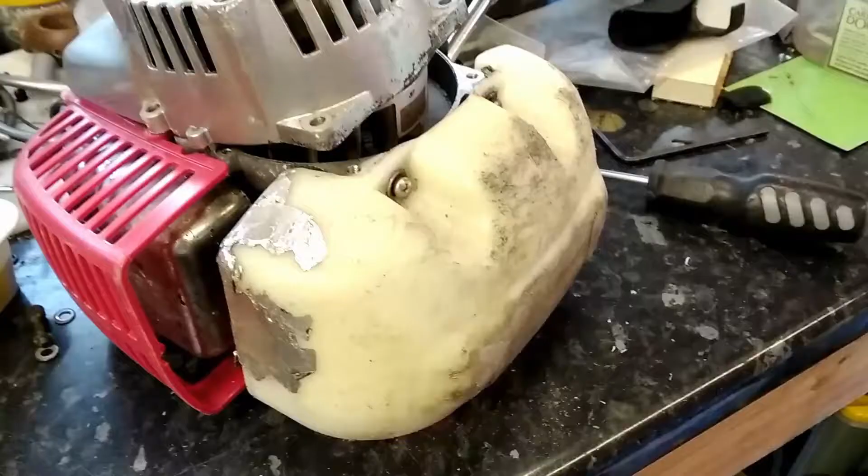So now I think we've got some screws that hold this thing on, and we'll have a look at that. We'll take those off in a moment and reveal what's behind it. Okay, so we've taken the screws off and lifted this up. There are some little locator pins which fit into the frame, so it could be a little bit trickier to pull out, but not very tricky.

And obviously here's the clutch, which I presume - yes, because of the spring. Oops, I keep moving, sorry, I don't do cameras very much. I presume this is a centrifugal clutch, so when it goes fast, these spring out, I suppose. These springs keep them in, and they engage with this little drum here, which is the bit that I'm after.

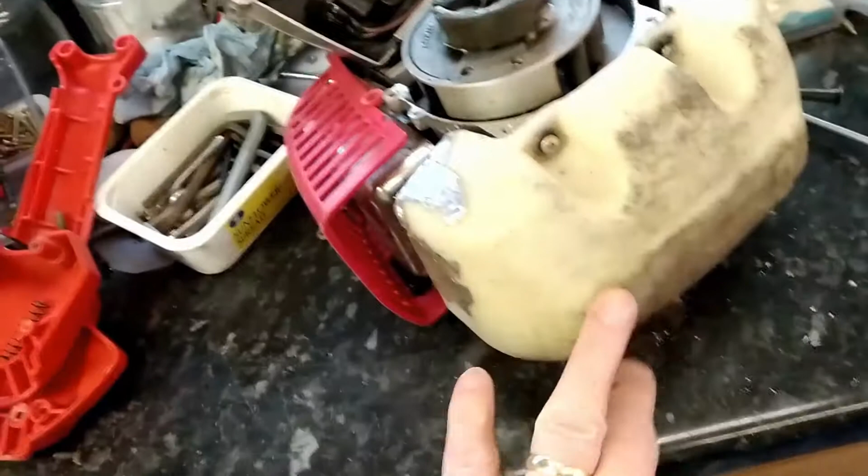So I'm going to make that bit. I'll keep all of this, I think, most of this. I'm going to make this bit part of the new arrangement, which means we can get rid of all of this - the tank and the piston and the really dodgy carburettor, which has never made it run very well.

There we are. The thing I really hate about it is the noise. I don't like the noise, don't like the smoke, don't like the smell. I don't like playing with petrol. So I'm really quite pleased to get rid of it.

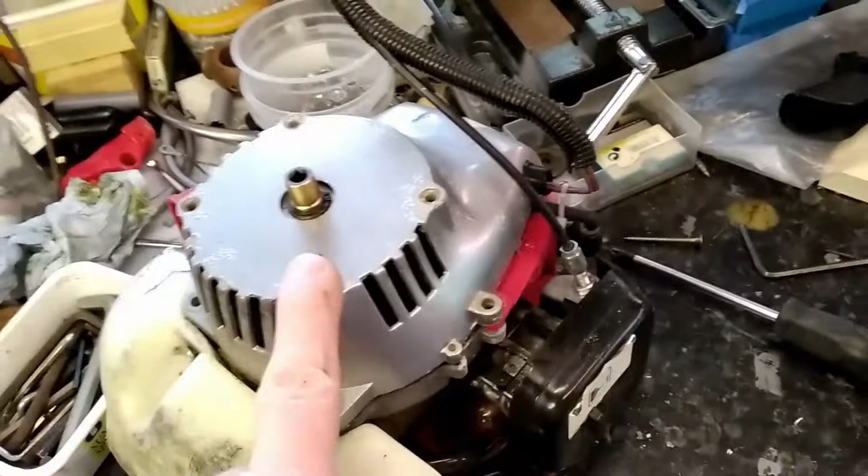However, I've got to make the thing work. So I shall show you the electric motor in a minute, but first of all I'm just going to take this whole shell off, and we can see what we're going to do with it. So a bit of tidying up to do, and we'll have a look at it again.

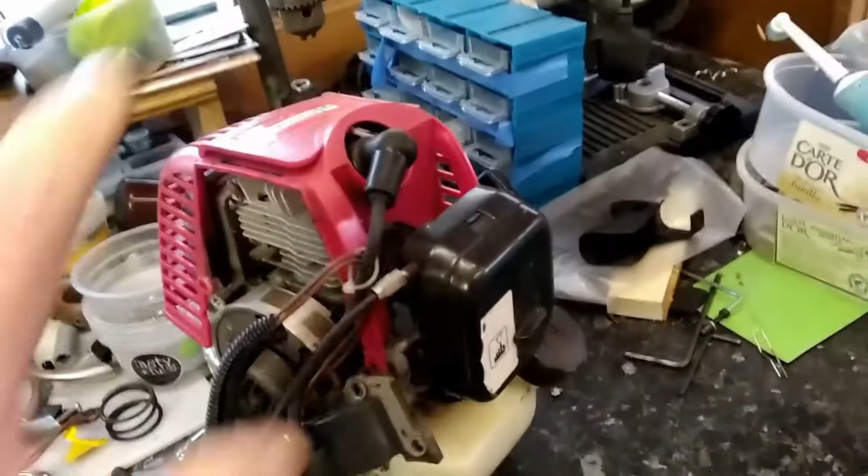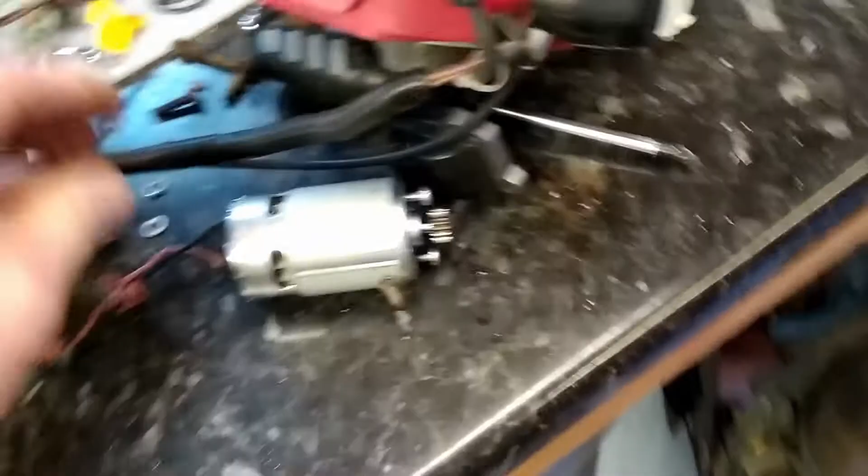So the purpose of the exercise is to replace this hand-sized, loaf-of-bread-sized motor, which is the single-cylinder motor we don't want anymore. We want to try and replace it with this little thing. So there it is - that's the old motor, and that's the new motor.

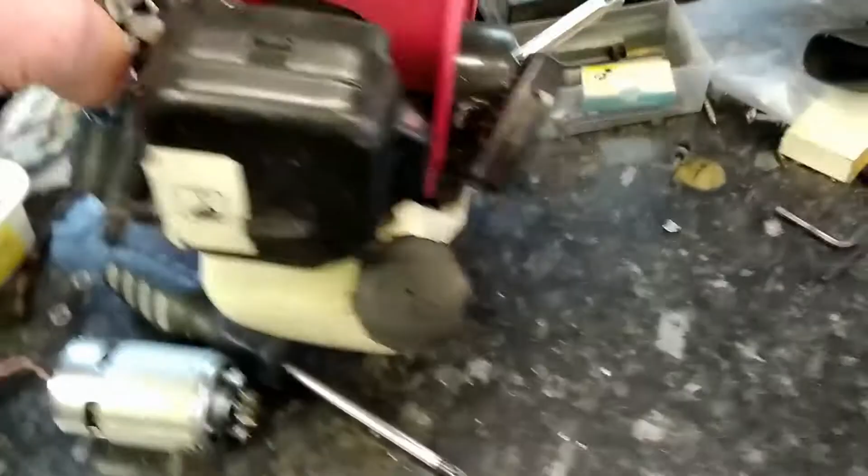Yeah, I wonder if it's actually going to work. I shall let you know. These are quite powerful little motors. I think this is what's called a 775, but it doesn't have a number on it, so I can't be sure.

Whatever it says, we're going to use it. I know it works off 18 volts because that's what the old NiCad battery that used to power it had. So this goes - thank you very much for years of really irritating service.

And then this is going to have this stuck in it like that, by some means or other - not quite sure how we're going to do that yet. So that will drive that. That will have the snout put back on again, and then that will drive the tools. We shall see.

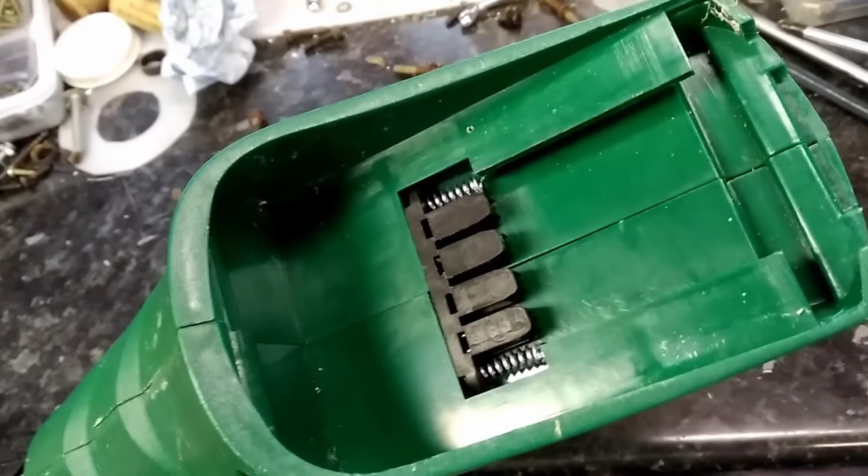So this is the handle of the old hedge cutter, and it's got a battery holder in it and a useful-looking trigger. So what I'm thinking of doing is, whilst I'm working out how I'm going to mount the little electric motor on the old clutch plate, I'm going to look at whether or not I can modify this battery holder to work with the battery for this mobile drill, which is also an 18-volt battery.

I don't want to damage it because this is my little tool. It's only a cheap one, but it works. But that 18-volt battery has a very similar looking, but not identical, unfortunately, connector. Hold on, let's just show it to you.

So here's the battery, and you can see it's got 3 pins and a slidey thing. So 3 pins and a slidey bit. And this has got a slidey bit and a couple of pins. And obviously they don't actually marry, but that sort of slides in.

So I think we could actually modify that. It slides on but doesn't connect, so that might be useful. So that's the type of connector we have in the existing drill, positive and negative - negative on the left and positive on the right. And you'll see that it's not the same pitch.

I don't know if you can see, but actually it's not quite the same pitch as the one that we've taken off the old thing. They look as if they might just be, but in fact, when you look at them, they're one line up and the other one is about half a hole off. So we will take this old one

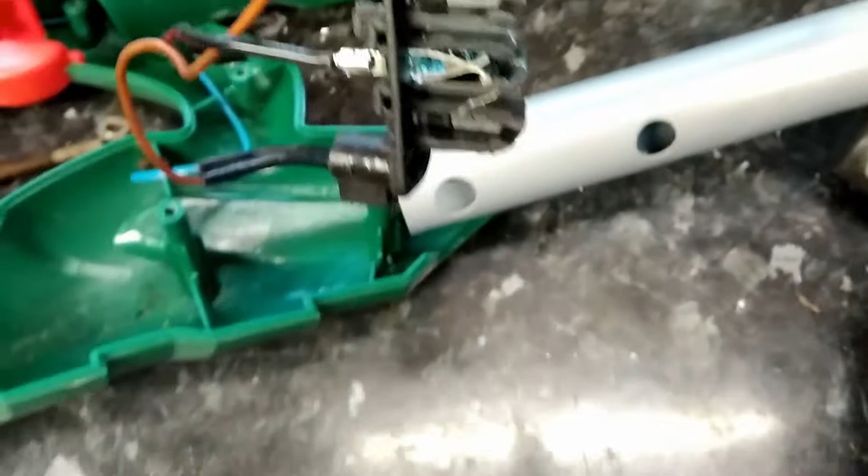and we're going to chop it probably in half. Yes, chop it in half here, I think. See if we can fiddle with it to make it work, make it go together, and then somehow magically make it all fit together, and then go back into this thing, and then this battery will slide in because it fits, as my mother used to say, it fits where it touches.

But it actually fits more or less into the case. Okay, it doesn't have a latch, but we might even be able to modify that. Don't know. So it fits into the case like that. Sorta, kind of, sorta. I think this is going to work. It's going to be a bodge, but it's going to work. Hold on, let's have a look at it.

Yeah, I think if we just add a bit of plastic coming down from that green bit to snag that little red triangular bit just there, then that battery can be made to lock in place to this, and then we'll have a device which locks the battery into place. Fiddle about with that connector so we can make the connector.

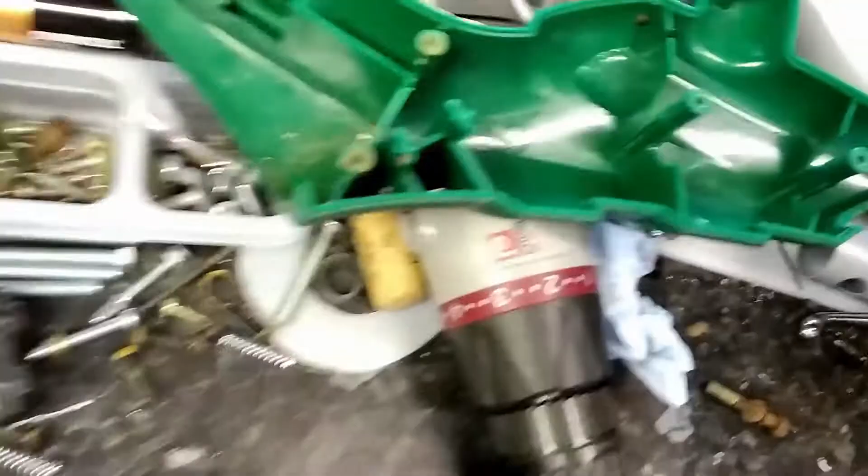The battery isn't quite long enough to go to where the connector originally was anyway, so it's going to have to be in a new position. So I think we can do it. Might have to do a bit of 3D printing. We might have to do a bit of other bodgery.

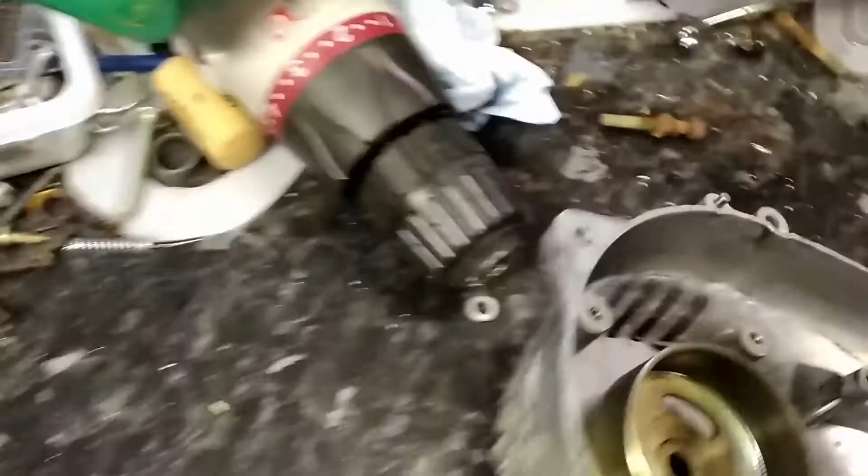Oh, I was thinking about this other thing. Hold on, let's just move this around. So what I'm going to do, using a bit of the old hedge saw, rather than have to go to the trouble of taking the cog off the motor, I might as well use the assembly it came with.

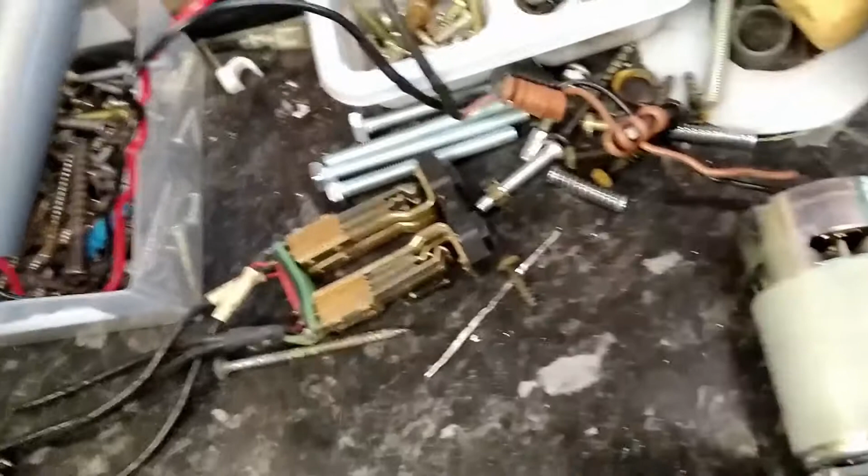It had a reduction gear, which is roughly 3-to-1 reduction gear. This turned another big cog, which is a bit greasy, so I'll put in a box. So that slid onto there, and that off-centre bit is what drove the blades up and down, but we don't need that. But I think this will go into here.

So what I'm thinking of doing is effectively filling this little cup with plastic. I'm going to make a 3D printed insert, basically a chunk of plastic to go in there, with a hole in the middle, and that hole in the middle is going to be exactly the same as that cog, the smaller of the two cogs, so that it will fit snug.

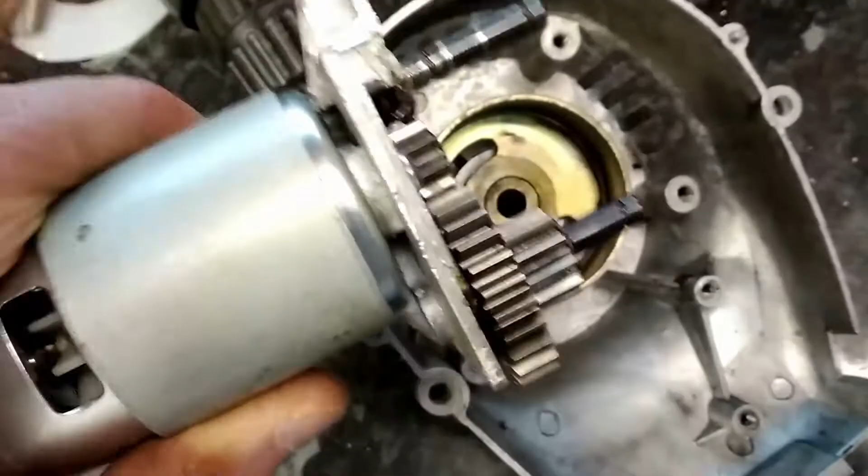That stalk, being long, will fit into that hole, so I'll know it's centred, and then I'll be able to drill a couple of holes to lock the plastic in place by some means or other, so that I can transfer power from this motor through that, reducing it a little, which I think will be a good thing, through this cog, through to that drum, away to the tools, and I think that's going to do it actually. So I'm going to have a go at all that.

The other way of doing it would be to take this cup thing off the clutch, get to that brass bushing, and somehow connect that brass bushing to the cog, or either the reduced cog or the direct drive. But I don't have any means of heating it, and I don't want to do that.

So I just want to have a go with it like this. So that's what I'm going to do. So there we are. It's a couple of bodgeries to do. Bodgery the battery connector and bodgery the drive coupling.

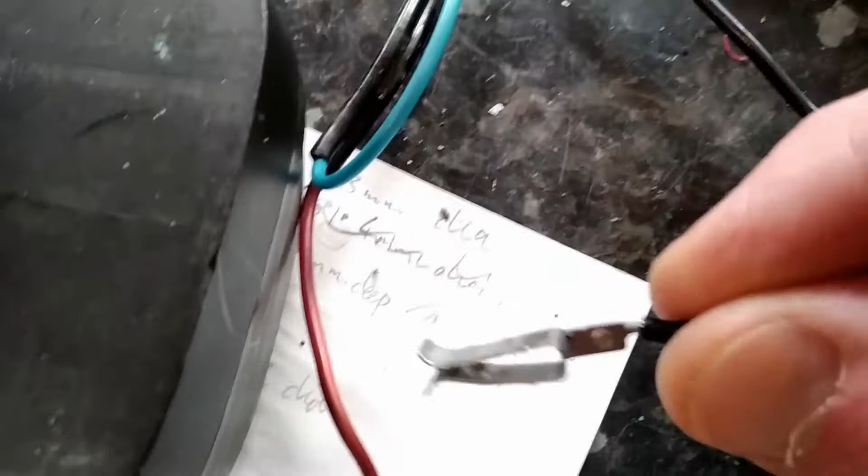So meanwhile, back at the electrical section, I've taken that connector and chopped out half of it, or half a connector's worth, and I've also taken out one of the terminals that needs cleaning. There you are. Yeah, it's got a bit corroded, that old one, so we'll give that a little clean.

I think a little vinegar and something will sort that out, just to get the corrosion off. It's not very bad, probably just give it a scrape actually.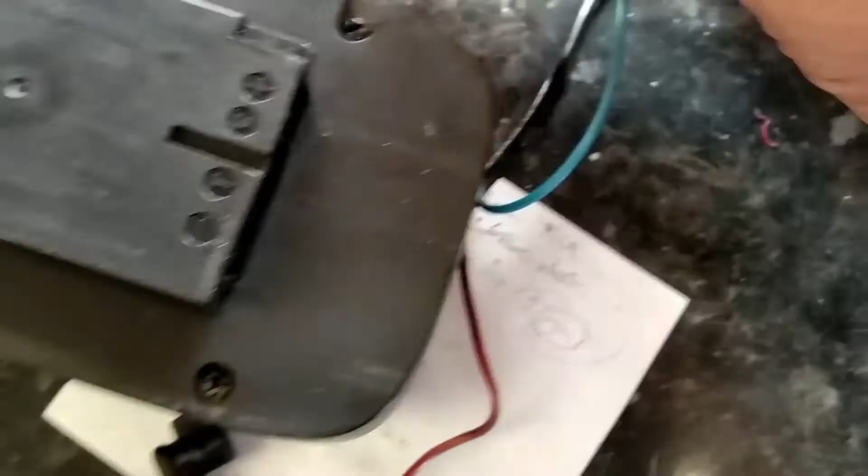Right, so this is the one that goes in here, and it fits. Not so easy to do it with one hand. I could get a tripod or something. That would be sensible, wouldn't it?

And that's the connector for the other one, and if that goes in there, you can see that the two actually fit remarkably well. There we are.

They work remarkably well if I use two hands actually. I might trim a little bit more off, but I don't think I will, because when I put them both in just now, there we are. Anyway, doesn't matter. I can get them to fit really rather well, and then I'll just create some sort of mechanical joint that holds them all together.

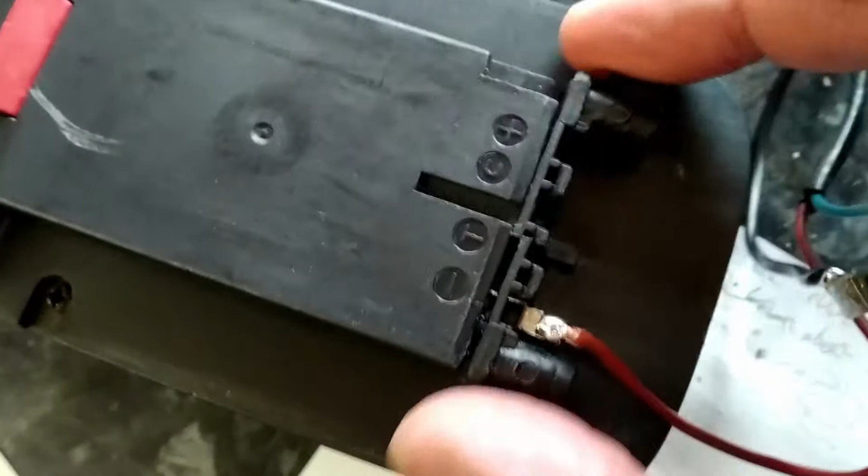That is a little narrower, obviously, than it was before, but these two little chunks of plastic here, you can't really see them, still fit into the grooves in the case. Obviously a bit loose, so we're going to work on that.

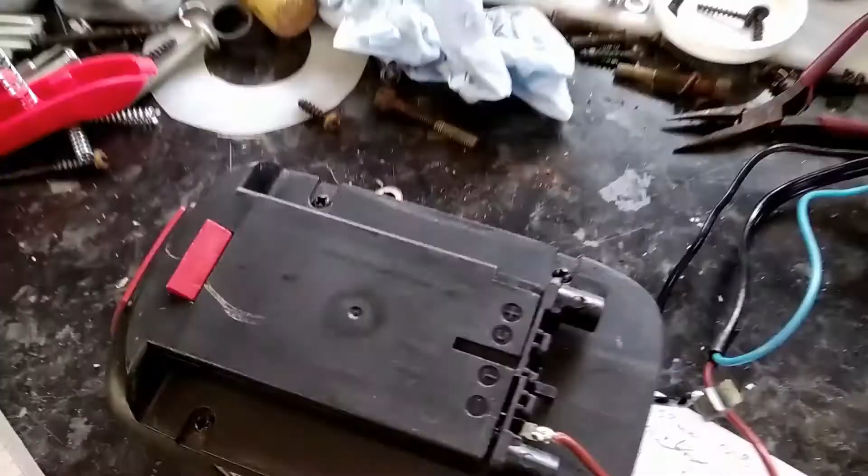But I think electrically we'll be able to plug this battery in. It'll click into place, that'll be cool. Then got to take the wires off, rewire the switch, and actually that's probably right. It's where the switch goes to next that we need to sort. We don't need it to go down the pole off to wherever it was going, we need it to go to the motor. But we'll sort all that out later.

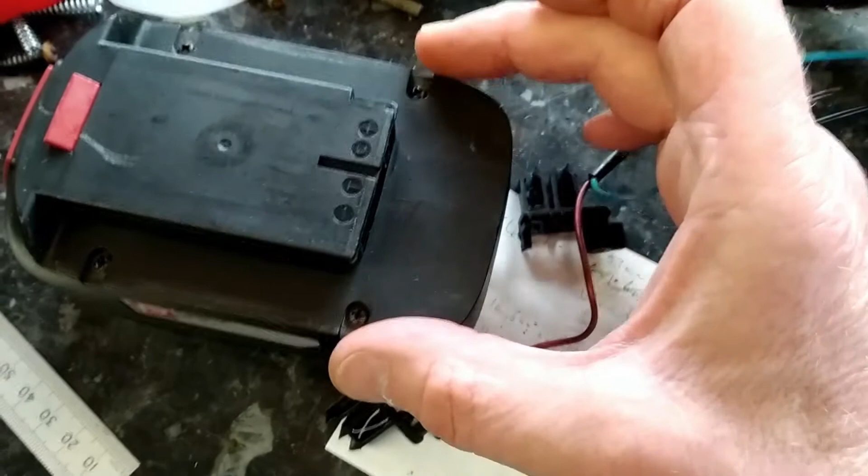Anyway, I'm quite pleased that looks like it's going to be fitting. The nice thing is that these connectors are virtually identical to the original connectors inside the drill. It's just that they were slightly wider and a different pitch on the carrier, as it were.

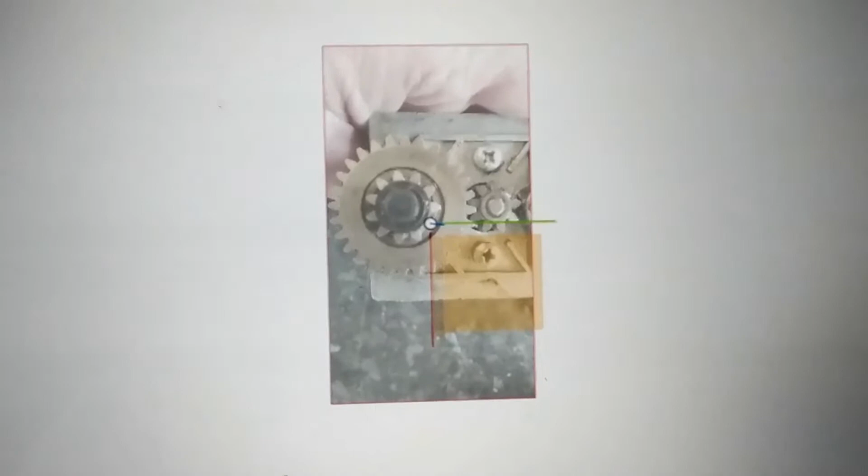Right, so we took a picture of the cog and we've taken it into Fusion 360, which is free if you're just a domestic user and not doing anything commercial with it. And then I sketched it. Let's see if I can recall the sketch. So I got the picture, then I produced a sketch, which you might just be able to see.

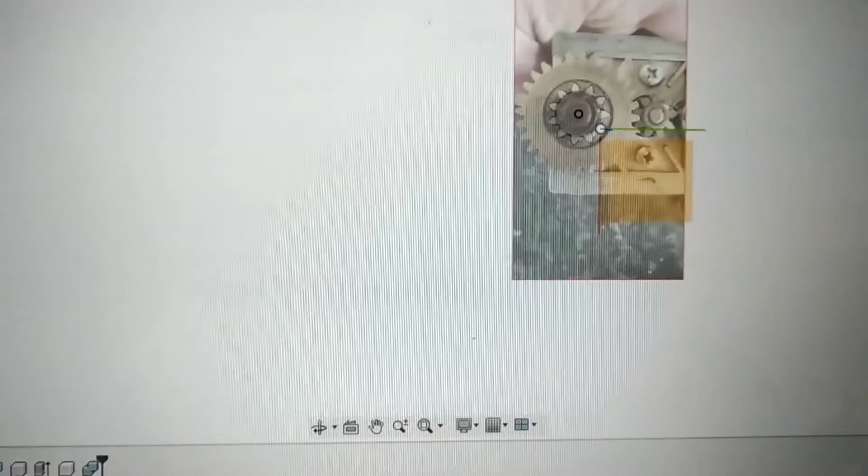If I just get rid of the picture of the cog, you can see I sketched around it. There's lots of tutorials to say how you did it, but actually all I did is create one of the little bits, mirrored it, and then made it do a circular repetition of 11, which happens to be the number of teeth.

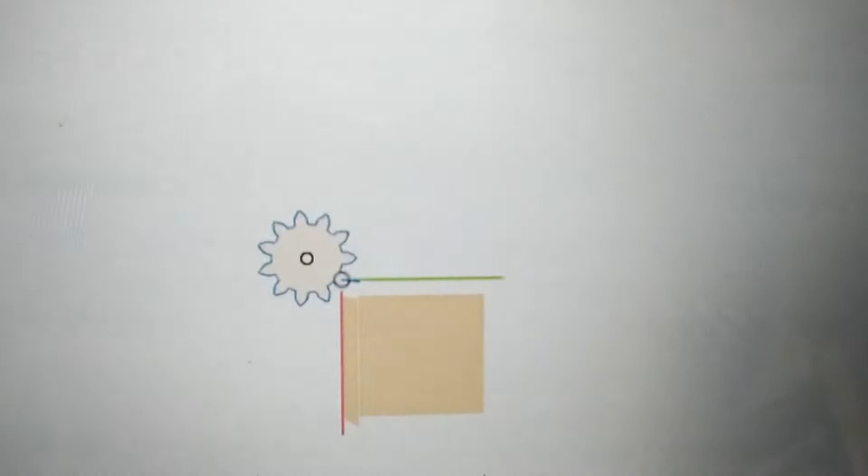Then I realised, of course, I hadn't bothered scaling it to start with, so I then had to scale it, but it wasn't a problem. I extruded the thing, scaled the image, and you can now see that we have a sort of cog.

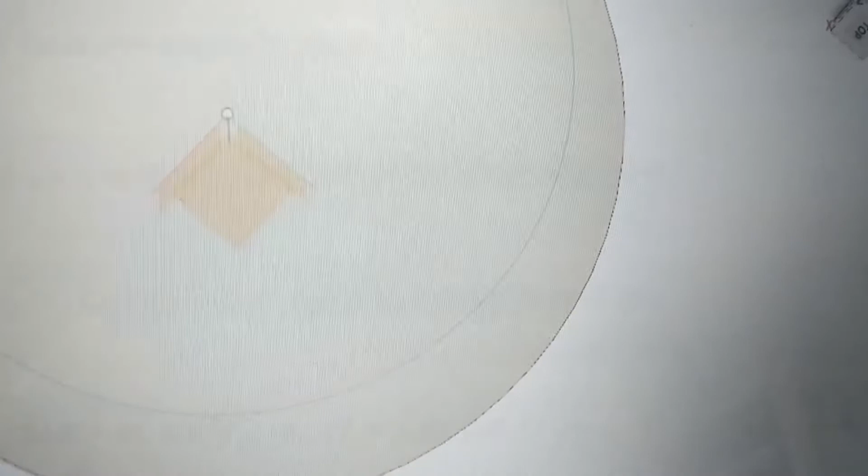And I'd drawn it enormous because I then drew the cylinder. Let's just make that a bit smaller. I then drew the cylinder I wanted it to go into. Maybe I did that. Oh yeah, I got rid of that one, and then I created the cylinder I wanted it to go into, which is just a block.

And if I put the cog back, you see the cog is sticking out, then get rid of that. I then subtracted one from the other, and I end up with a block with a hole in it, which hopefully is about the right size. So that should be the size of the clutch drum, and the hole should be the size of the cog.

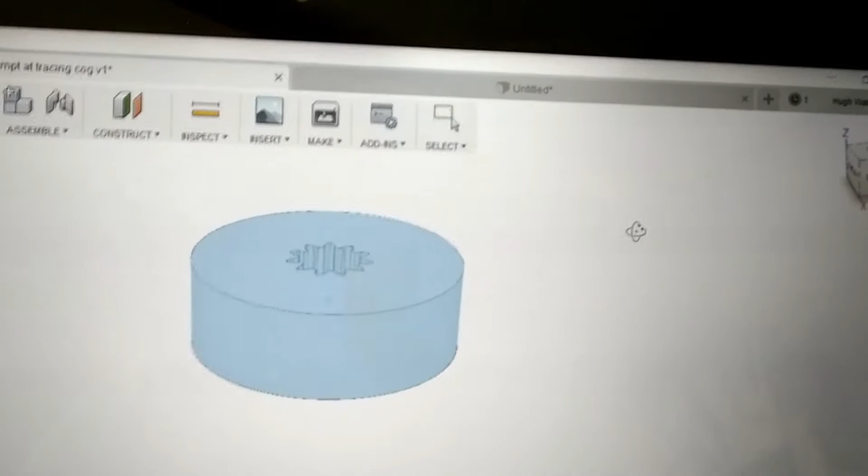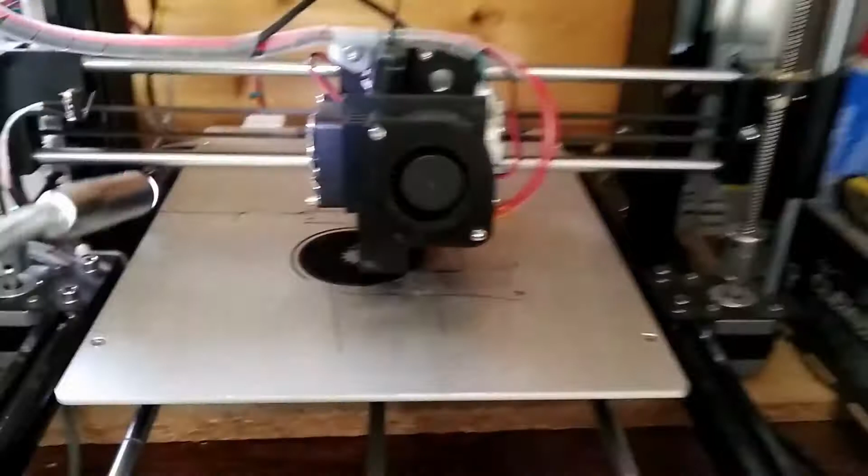Exported that into an STL file, and then took that over to my 3D printer, where it is busy 3D printing it. There we are, we can see it's off, it's going, and it's going to take an hour or so, and I've got to go out and visit family and stuff.

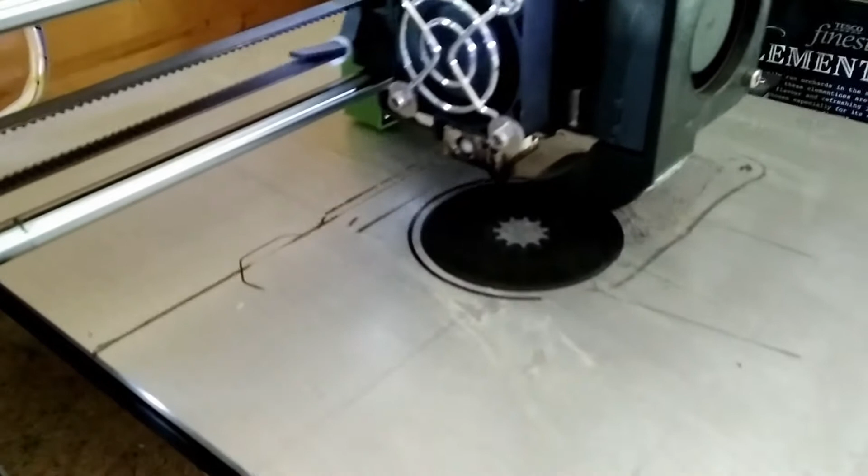So when we come back, who knows, there might be a piece of plastic which would be about the right size. Don't know if this is going to work, but if it doesn't work, it doesn't matter, I have several other ideas for how I'm going to make this thing. This is only a 50 or 60% infill, so it probably isn't strong enough, but it's only just to see if I've got the sketch about right. There we are, off you go, little printer.

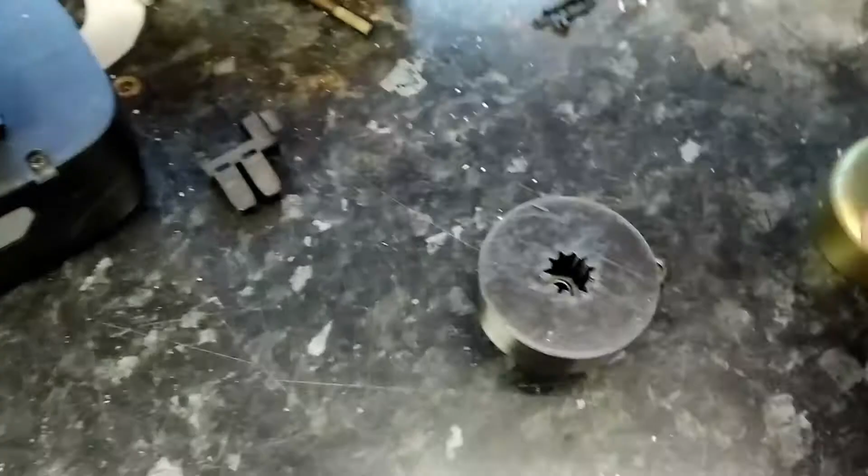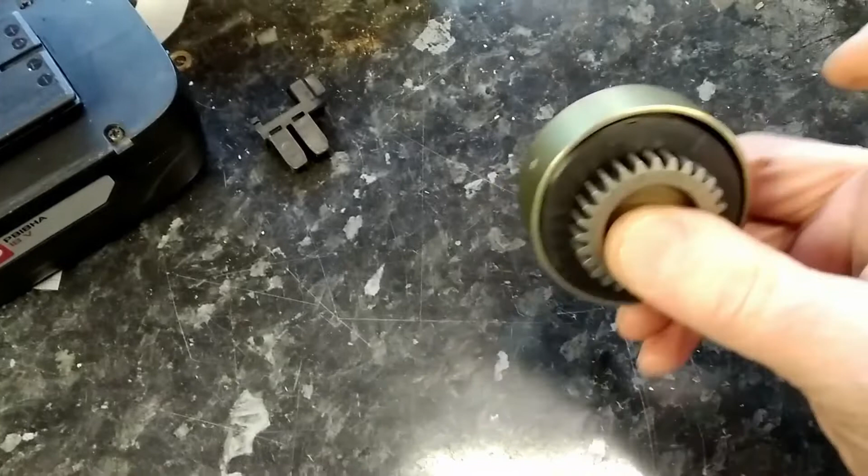Well, this is the piece that's come off the printer, and the idea is that this cog is going to fit inside that hole, which it will, and then that is going to fit inside that thing, so we'll have the cog inside there. So there we are. That's a nice tight fit inside there, and then the idea is I'm going to put a screw or something through the side. So I could have made this a bit tighter, but I don't think that matters very much.

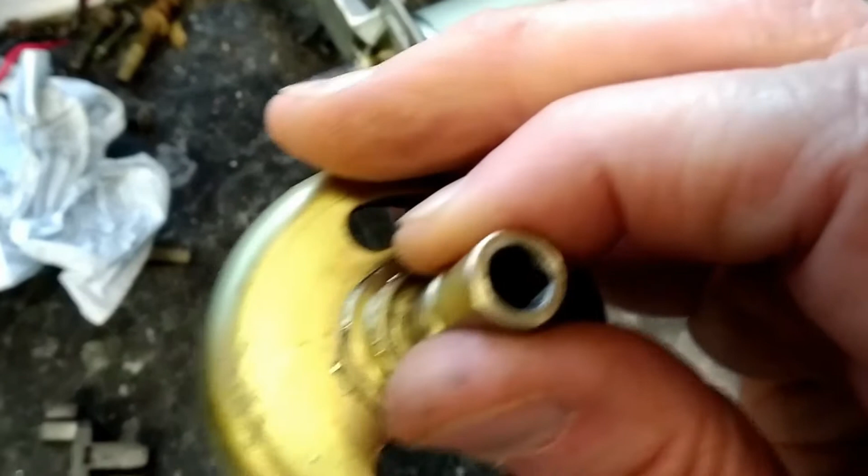We're not talking clockwork precision, are we? So the idea is that this is going to slide onto there. Bingo, bango, bongo. There we are. That's the motor is going to turn that cog, is going to turn that drum, and that drum is going to turn that. You can't really see it, but there is in fact a square hole in there.

So the next thing to do is to modify this. There are a couple of slots on the top, so what I might do is just see if I can put a couple of screws in through here.

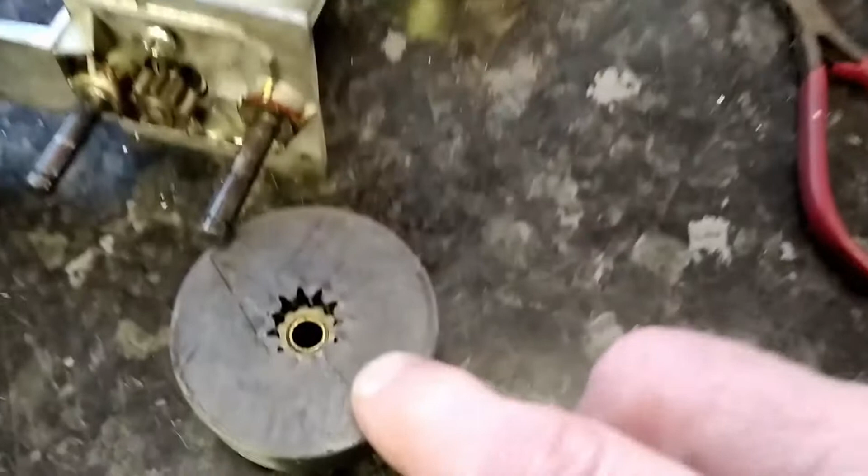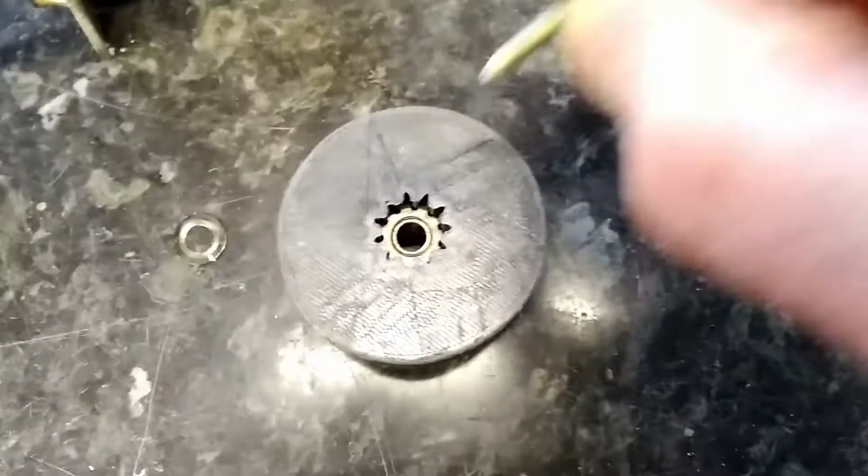As this is 3D printed, this isn't absolutely solid. I've actually only set it to, I think, 60% infill, so this is a sort of honeycomb structure inside really. It may not be strong enough, and the whole thing might just break when I put power on it. It certainly may not be strong enough to hold a screw going down sideways, so as soon as I start putting force on it like that, it might just tear. I was thinking of putting a screw into it that way instead, so at least it's going through more layers.

But who knows? I like the idea of not modifying this. For some mad reason, if I wanted to, I could just about put the whole thing back the way it was, though I really don't want to. But because I've got these two slots, it seems sensible to have screws there, and maybe probably a step too far, but I was wondering if there was a way of putting some sort of shock absorber in it, so when the machine jams against something, this could spin slightly against a spring. Probably a bit too far, really, especially as there is actually some shock absorbency built into the flexible drive shaft going up the pole of the tool.

This thing is actually a sort of spiral metal thing, so it's got some give in it. So maybe the thing to do is just get a couple of screws and shove them through there. We shall see what we shall see. So anyway, that's the next stage. I'm quite pleased that the drawing and 3D printing and all that stuff has come out okay. If this didn't work, there are plenty of other options. If you don't happen to have a 3D printer, there's no reason why you couldn't fill this with epoxy or something and set that in it, or something else far better. Anyway, that's what I've done.

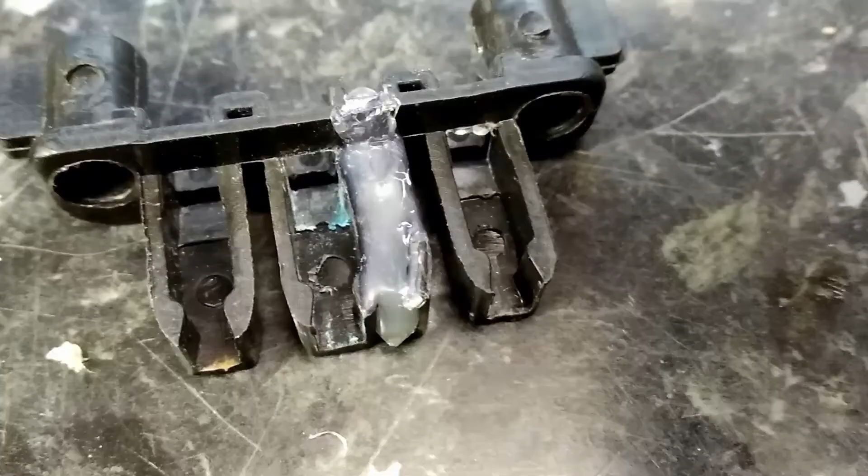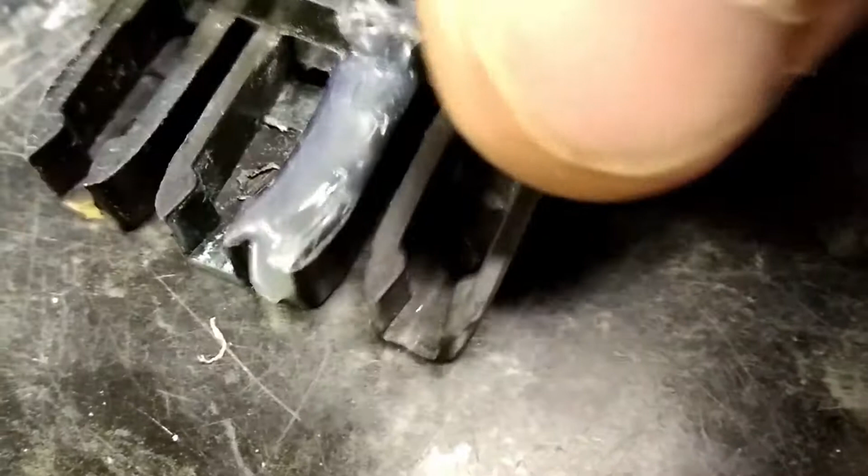Well, I was wondering how I was going to join these two halves of the connector together, and then I thought, why don't I just hold it in place with a glue gun? Actually, it's remarkably strong. The glue gun has stuck very well, so I'm sure it won't be permanent, but it certainly seems pretty effective, and that will do for that. As you can see, it's a very high-class piece of precision engineering, in keeping with the rest of this project, but it doesn't really matter very much. It's all going to work, I think.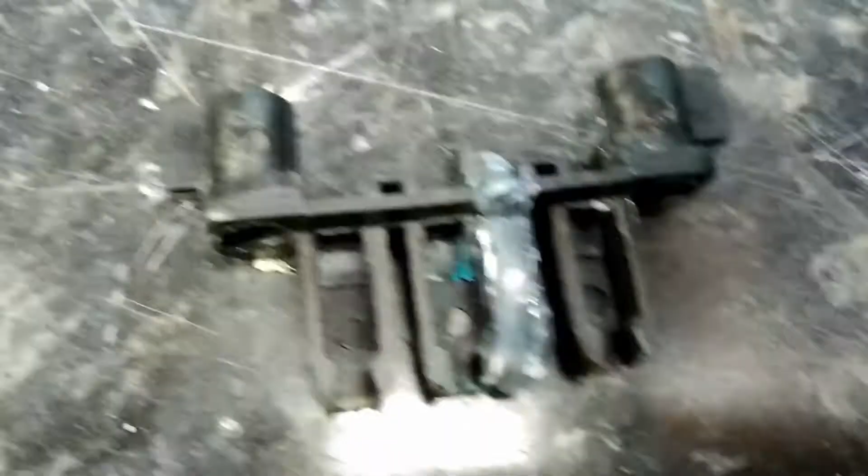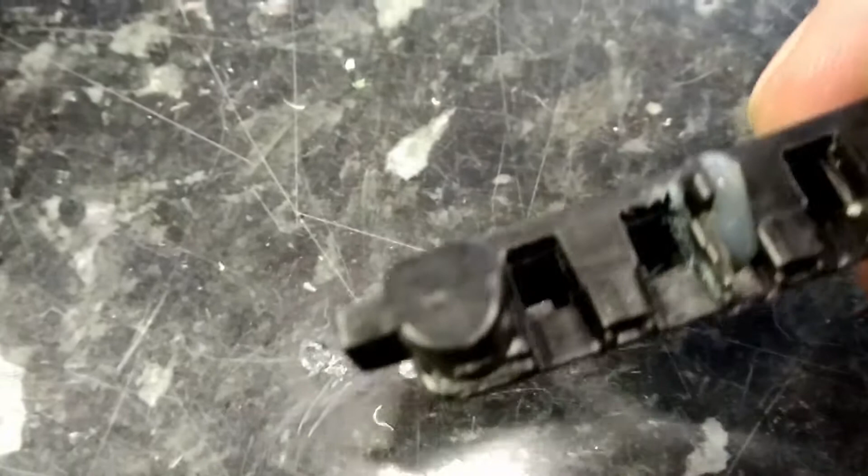So now we have to put the connectors back in the right places, which we'll do. These particular ones are easy because they're just a sort of push fit through the hole. I don't know if you can see the hole there. There we are, they just push into place, and the whole thing slides into the battery quite well. So there it is. Whoops. There we are. So that's going to work as well as it needs to, really. I don't know how long it'll last, but it seems to come in and out perfectly well. So there we are, that's the electrical plastic adapted.

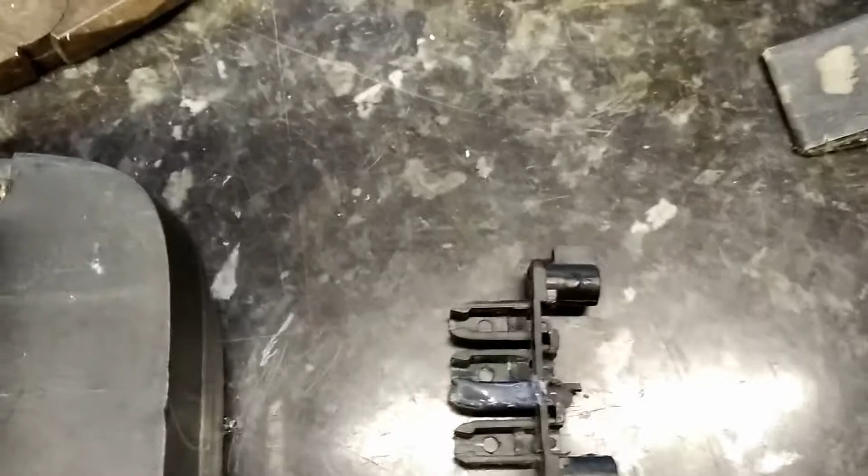We've now got to work out how we mount that into the handle and the handle onto the box. But for now, we need to return our attention to making this device sit inside the shell, sit inside the housing.

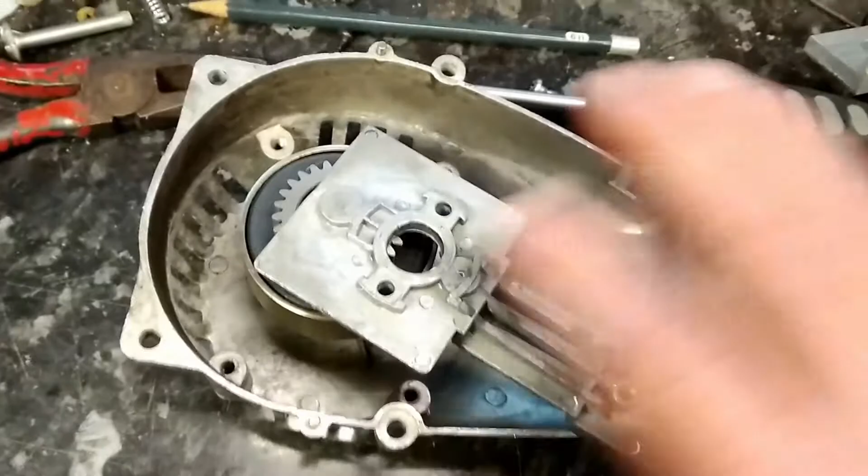So that's got to go into here, and extraneous bits of metal have got to be taken away, and the whole thing's got to be made secure. Now, I don't know how I'm going to do it, so we'll scratch our brains and I'll tell you what idea I came up with. It'll be a bodge, though. Of that I suspect we can be certain.

That makes a really good fit, but it's not really necessary, and I'm going to have to do some jiggery-pokery with this metal, and I suspect it's going to be quite awkward.

So I'm going to have a quick mental detour, have a look at modifying this case so that the spout sticks out. I think this device could be made to attach to that device relatively straightforwardly, and if it can, we might actually have a better solution, or just a better interim solution.

Obviously this plastic casting is designed to hold that motor wherever it's gone to. Here it is, the motor slots in there. So it is all designed to fit.

So I think we might have a go with it. I mean, the thing is, I'm only going to be chucking this away anyway, so I might as well have a go at seeing if I can adapt it. And if I can, and it's strong enough, then that saves chopping up a load of bits of cast metal. I'm a bit worried about chopping cast metal because it isn't that strong. So, yeah, I think that's probably going to do it.

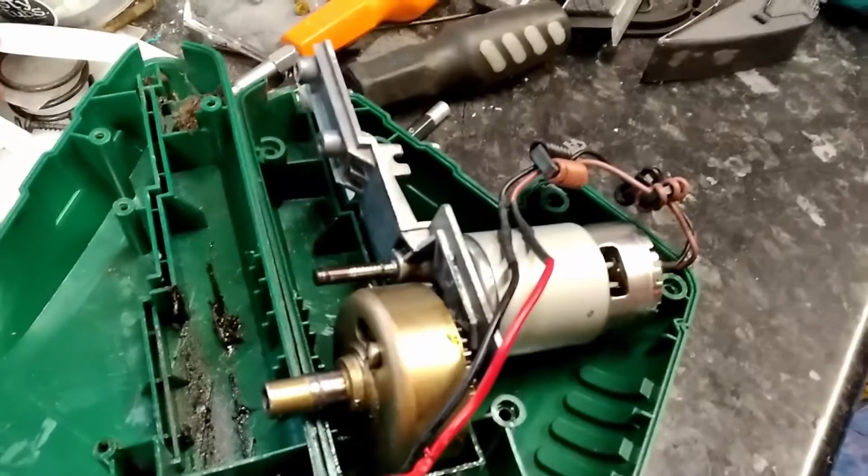So we'll have a look. We'll create a new opening here for this to pop through. We'll see if we can create some screw holes and possibly get some strengtheners of some sort, so that the red bit at the end of the tool can be screwed to here. And then all I've got to do is work out how to get the battery mounted and the power control mounted in a neat and effective way.

Anyway, here we go. Well, the zombie tool is now finished. Well, finished-ish. There's a couple of things I'll improve, but the battery is now held on. That's going to be a piece of plastic eventually, but it's a piece of metal that just holds the battery in. The battery clip is working. It just needs to be secured, but you can unplug the battery and plug it back in again using that connector.

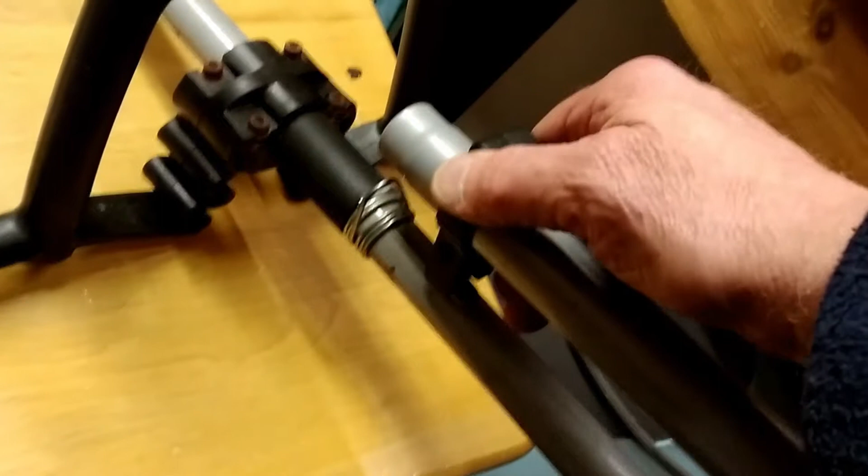I used the handle of the existing box, and I might still do something better, but it seemed very straightforward. Just get the handle with the wiring in it going to the motor, so that's all contained in here. The original switch, which has got a nice interlock to it, fits on quite neatly simply by putting a pipe clamp. There's one that was part of the original hedge cutter, and I've temporarily just screwed it on with a sort of little plastic P-clip.

You can't quite see it, which goes through underneath there. You can just see it's a P-clip. It's a bit flexible really, so I want to make that a better clamp, or possibly cut this at an angle and screw it on neatly, but since I'm not convinced I can do it neatly, this will do for the time being. And the thing I'm not proud of is that I'm using a couple of cable ties to hold it together, but I'll get a nice piece of plastic that I'll probably print or fashion in some way that fits in here, so it holds it a bit neater.

But essentially the whole thing is together, and it spins this thing around really well. And it's night time now, so tomorrow I'll show you it working. But here is the zombie... whatever it is... the zombie weed whacker. So there we are.